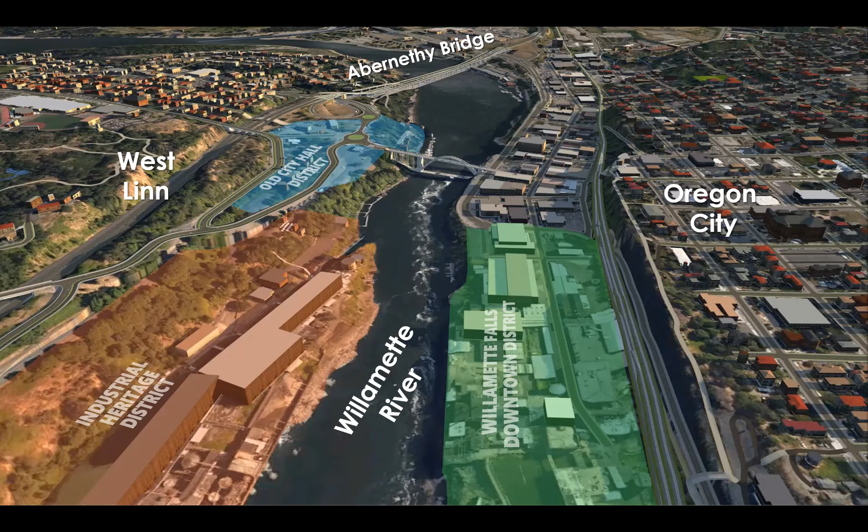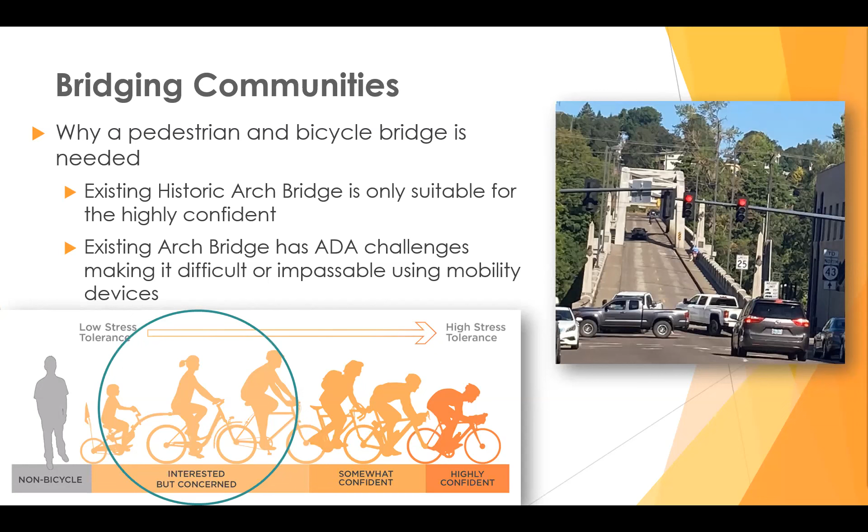We wanted to create this plan to create opportunities for the interested but concerned travelers and cyclists, which would accommodate 70% of the population if we were to identify a ped bike only bridge. As I mentioned, the Arch Bridge has ADA challenges, making it difficult or impassable for folks using mobility devices.

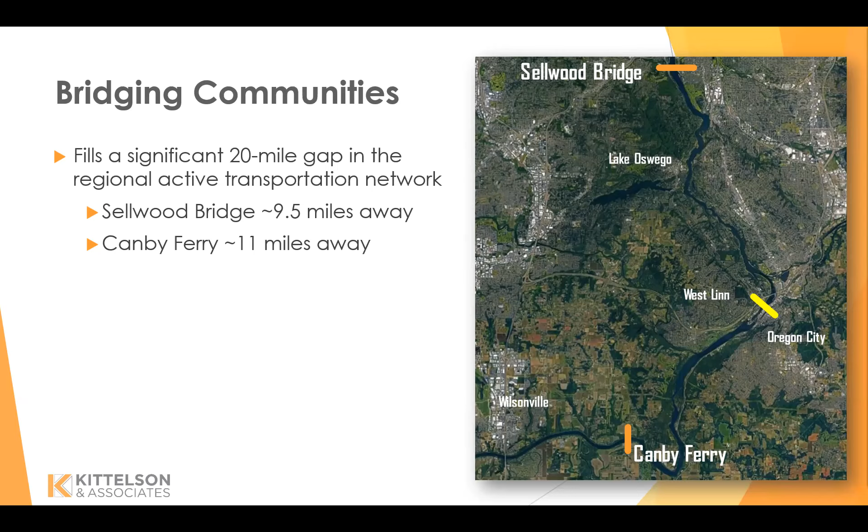This project encountered numerous challenges, ranging from the technical and physical challenges of designing a bridge that met the 5% grade, because there were steep differences in topography on either shoreline. We also had the challenge of incorporating diverse perspectives, and coordinating with various transportation and redevelopment projects in the area. So the challenges were numerous.

For the purpose of this presentation, we'll be focusing on the challenges with integrating diversity, equity, inclusion, and access around planning in a culturally and historically significant location, implementing an equitable engagement framework, as well as engaging with communities during a global pandemic.

Some of the challenges Nick will be addressing are understanding the key destinations and demand for the new bridge. What are the destinations and how do we locate the best connection? And then also assessing view sheds. Next slide.

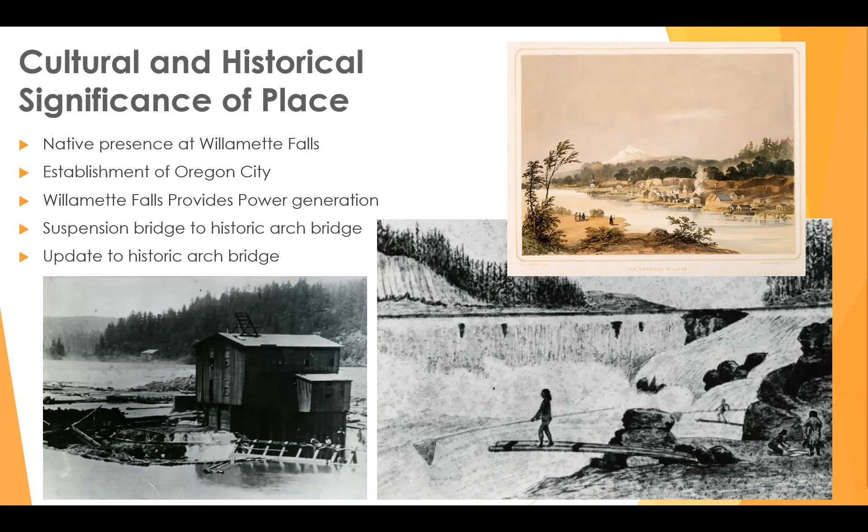We also learned through looking at historic photos and doing some research that there was a suspension bridge for pedestrians back in time before the historic arch bridge, which was used as the temporary access. Next slide.

And so with creating an inclusive engagement process, as I mentioned, we engaged with communities throughout the project with focus groups and was able to offer compensation through ODOT's equity engagement compensation policy. We initiated tribal consultation and also invited them to participate in our project advisory committee.

That engaging with them early and often was a key component of our decision-making process. We communicated to the advisory committee and the steering committee early on that we were elevating the voices of the historically marginalized communities and voices.

We heard some interesting perspectives through our conversations with the tribes, one of which is that, while we thought that creating a bridge connection closer to the Willamette Falls would be a benefit for all, we learned that many of the tribes did not prefer that alternative because they still engage in cultural activities and didn't want to be kind of a spectacle or looked upon. So that was actually a less preferred alternative for several tribes.

We again elevated the voices of historically marginalized communities. We engaged with focus groups, including youth, and heard about some of the benefits and burdens of the various alternatives.

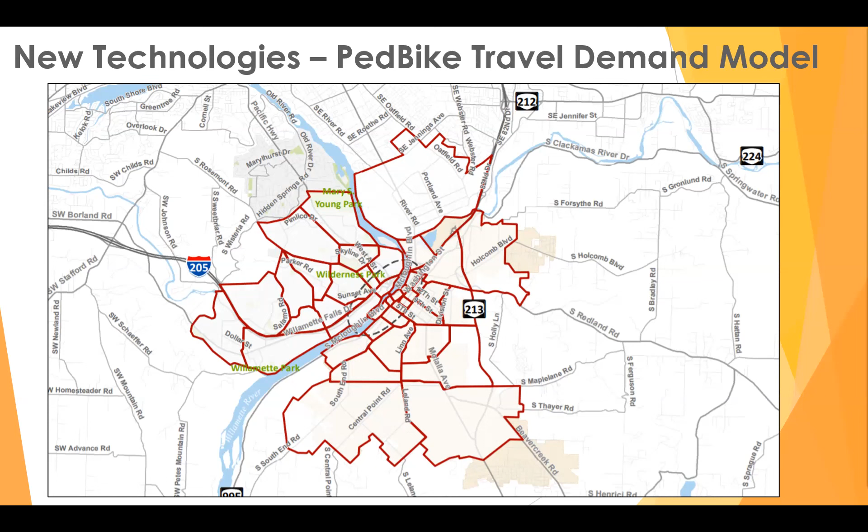So using this data as a platform, we created a ped bike travel demand model specific to our project area. The polygons or outlines you see here in red are our zones, our transportation analysis zones, or TAZs, as some people may have heard of before. These were uniquely identified by our project team, trying to understand the general breakpoints of land use and origin destination, essential destinations. So we ended up identifying 40 zones that we wanted specific StreetLight data pulled from to understand how people are traveling today.

We then created our own internal spreadsheet tool of a travel demand model based on the outputs of that StreetLight data. I want to specifically touch on some of the attributes we included in that model and some of the assumptions. The first was distance. This should all be thought about as accessing these future and potential bridge heads. So how far are people traveling to access a given bridge head on a given alignment? The further the distance, understanding that mode choice - if it's shorter, we're seeing higher use of people walking, if it's longer, a bit more people biking. But around the one mile mark is where we start to see those numbers taper off.

We also considered comfort, and we conducted what's called a level of traffic stress analysis to understand the comfort and experience of someone accessing a bridge head.

So how comforting or stressful is it to access that bridgehead based on the existing facilities that exist today, as well as the planned facilities already adopted into the city's transportation system plans. We also considered grade, thinking about elevation change to access a bridgehead. A steeper trip may mean less demand for that bridge alignment. And then finally, connectivity, thinking about barriers people might face accessing a given bridge alignment.

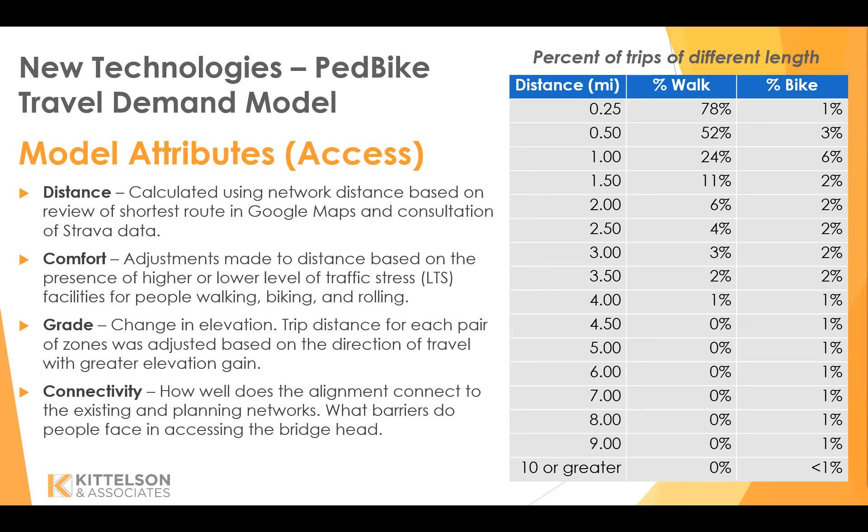A couple more softer assumptions went into this model. The historic arch bridge is not going anywhere. It's a great asset, very aesthetically pleasing, and it's going to remain. So while it's a barrier for some people using mobility devices, and challenging for people walking and rolling with the shared lane, it still functions as a connection. We assume that if it provides the shortest path for people walking, they would likely still use the historic arch bridge today.

For people biking, those who've biked across the historic arch bridge from West Linn to Oregon City have a fairly good downhill grade. We assume people biking would still go from West Linn to Oregon City, because you travel about 15 miles an hour, roughly the speed of vehicles, so it doesn't feel stressful or like you're holding up cars. Whereas biking from Oregon City to West Linn, you're going much slower.

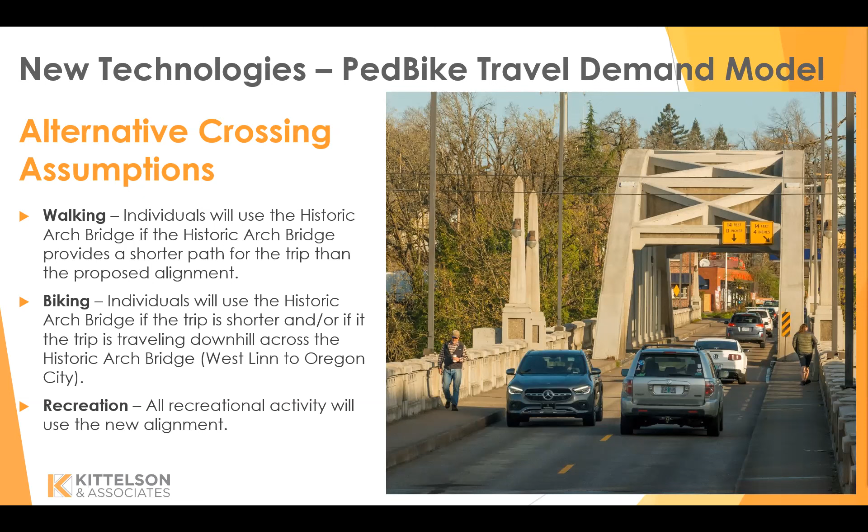And then recreational trips, we assume that all new recreational trips would use this new theoretical bridge alignment.

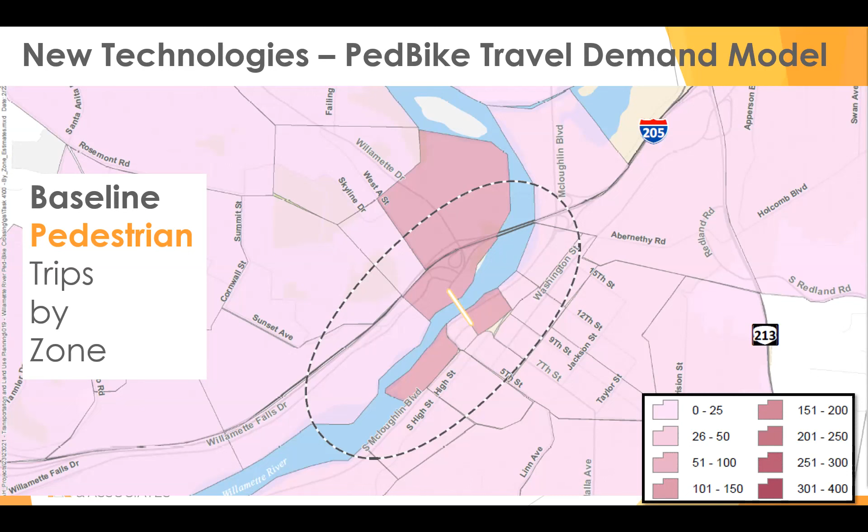These next couple slides are quick outputs of what the model looks like. This shows the baseline scenario of pedestrian trips, where darker colors represent higher levels of travel and lighter areas represent less. Here are two scenarios: the baseline on the left, the middle image is the upstream alignment closest to the falls, and on the right is the downstream alignment, where you can see darker colors popping up, representing more demand for a downstream alignment.

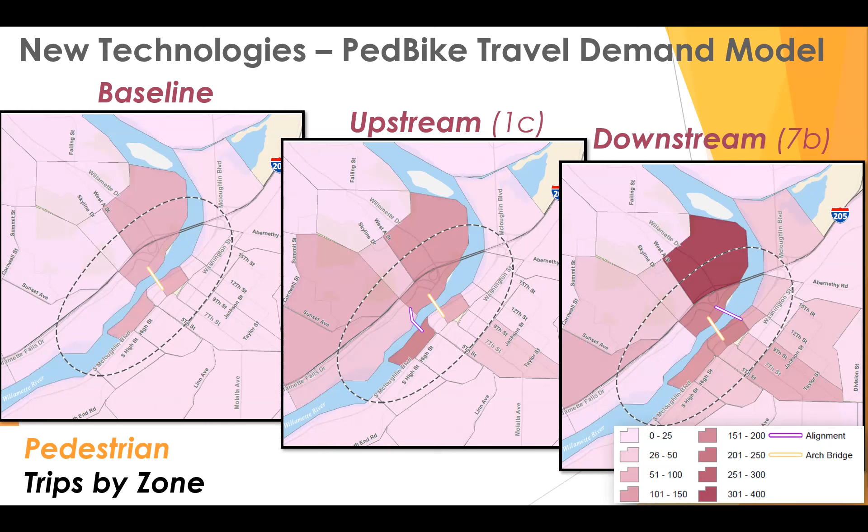We analyzed 5 priority alignments that rose to the top based on a preliminary screening. On the right side is a graph of future trips—new trips as well as potential mode shift. That trend going upward from left to right moves from upstream to downstream, so the downstream alignments show much higher demand for walking and biking trips.

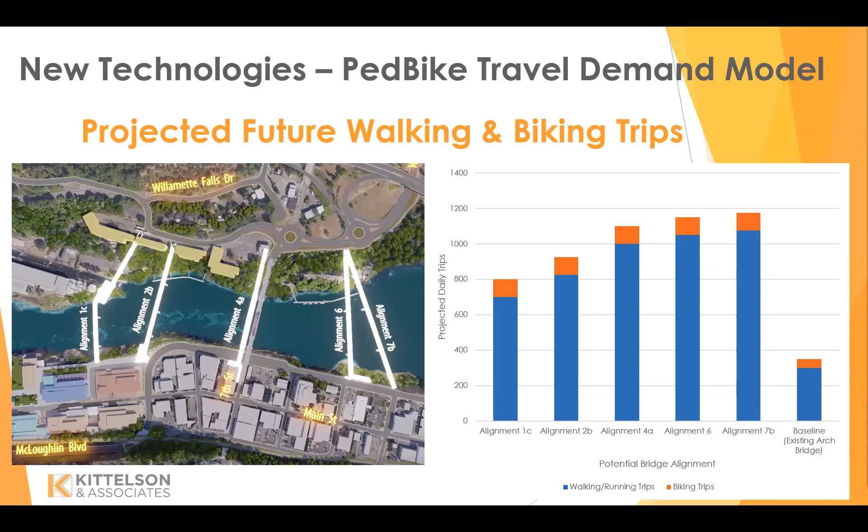We're pushing our time here, so I'm going to try to get through these ones relatively quickly.

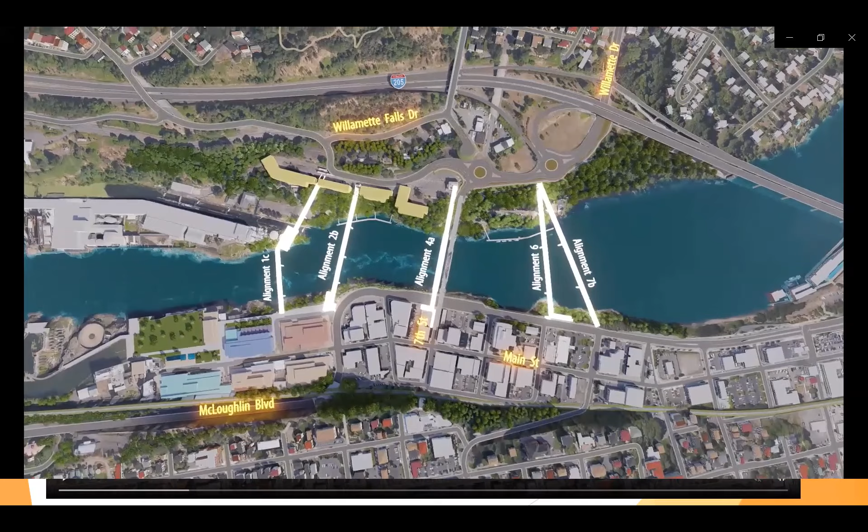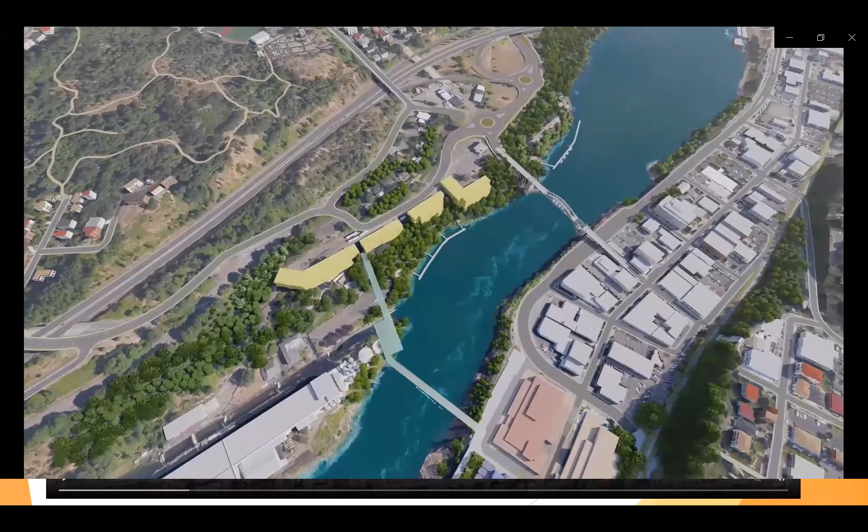One of the more exciting pieces I wanted to talk about is this innovative storytelling. We created a 3D model, and I'm going to show a very quick video of what that looked like. This was really aimed at addressing the concern of view sheds—thinking about whether a given alignment obstructs the view looking at the historic arch bridge, or the view looking to the Willamette Falls from the historic arch bridge.

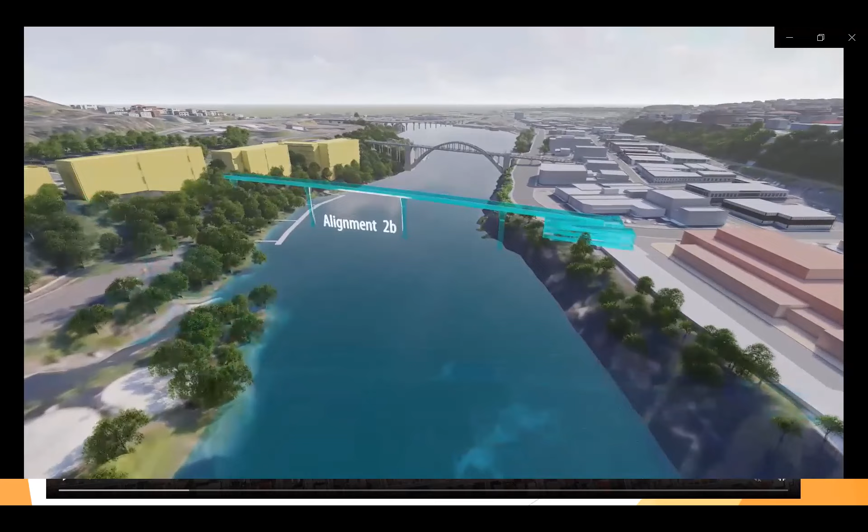So we created this model. It incorporates future planned development. I'm hoping everyone can see this—I can see Sandra and Zachary, thanks. This is flying through, illustrating the future potential alignments. You can see a lot of the ramping structure that's required.

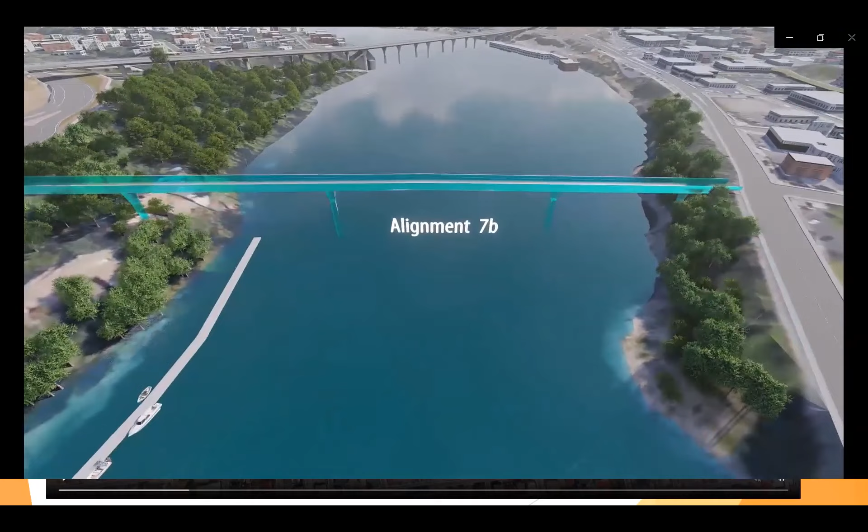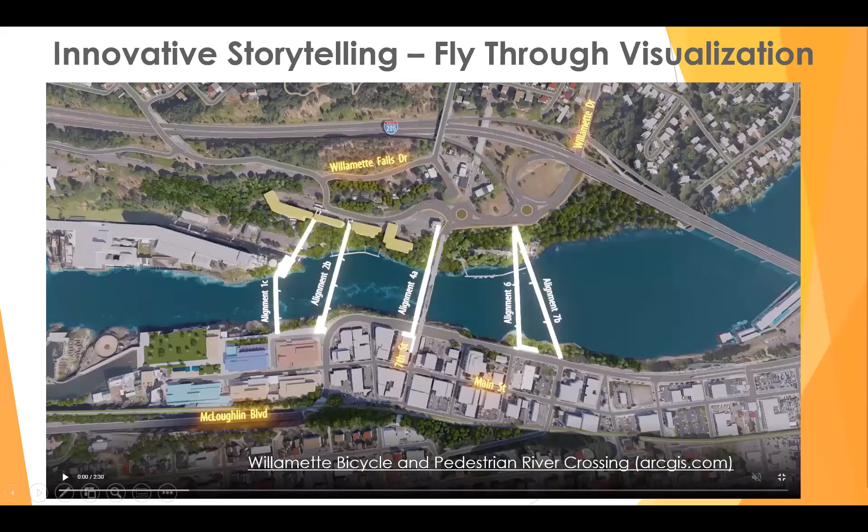A lot of our work was driven technically by grades, the navigable clearance required from ships and the Coast Guard, and the ramping structures needed to elevate the bridge high enough to meet that 5% maximum grade, as well as provide clearance for navigable ships. The fly-through going backwards is just down at water level. Given we're running a bit short on time, I'm going to exit out of this and wrap up shortly.

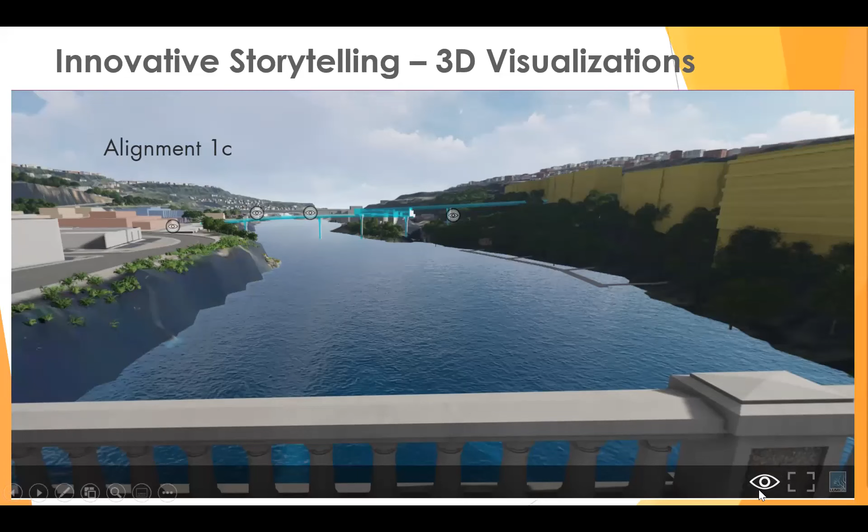One last bit on the model we created: we also had this user component to understand if you were to insert yourself within the model, somewhat of a virtual reality feature. These eyeballs let you click on them and pop around to certain perspectives in the model.

This is showing a perspective up on the Oregon City bluff. You can see the upstream alignment on the left side of your screen there, and then pivoting to the right, you can see the downstream alignment.

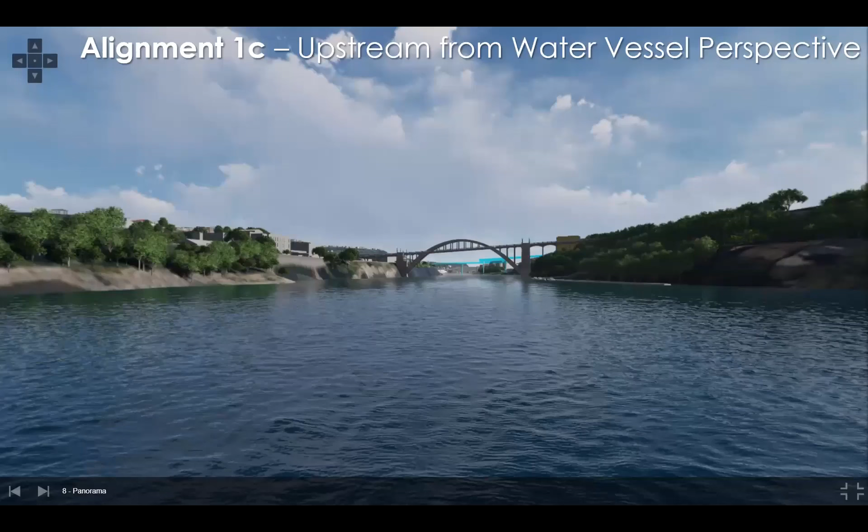Here's a perspective again that you could just zoom in and pop yourself in on the water. You can just make out the upstream alignment underneath the historic arch bridge there, and then the downstream alignment here, much more present and in the foreground.

So in conclusion, this planning process lasted about a year. We started with preliminary 7 options based on feedback from our project management team, our advisory committee, a leadership team, public comments, stakeholder interviews, and a lot of tribal consultation that Sandra had mentioned. We identified specific groups to focus on - the youth and the elderly were identified as groups we didn't engage very well in our initial outreach, so we went back and specifically targeted those groups.

And those 7 alignments morphed to 15. We then did an evaluation screen of the 15 to narrow down to the 5 most promising, which is what you saw in the model there.

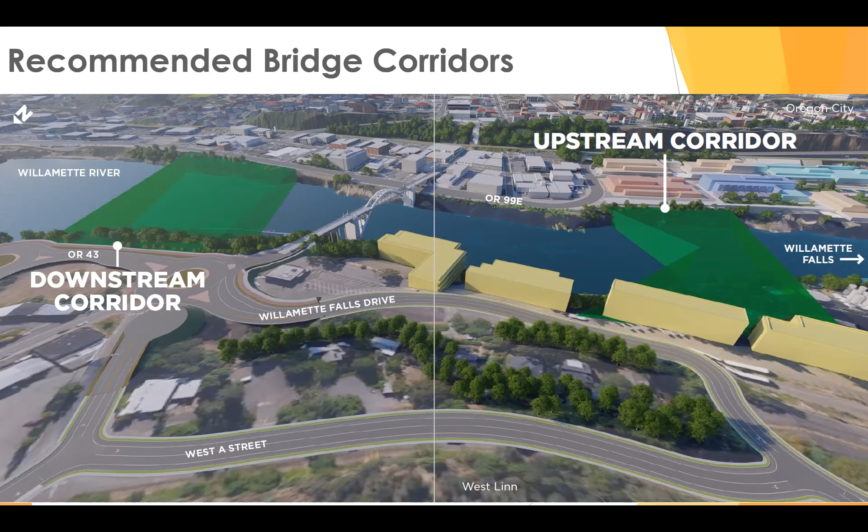And so there is a parallel project going on - it's actually further along. It's the Willamette Falls Drive realignment project, which incorporates these new roundabouts. It's been adopted into the West Linn TSP. It has separated, fully protected bike lanes on both sides of the Willamette Falls Drive corridor, as well as the realignment of West A Street. So there is a lot of future planned active transportation facilities and investment in this area. But today, the question - it doesn't connect to a whole lot if you were to think about a new bridge today, but it will, by the time hopefully this ever gets built, it should be connecting to a much more comprehensive network.

There's a question in the chat. At the beginning of your talk, you mentioned people with disabilities and later ADA considerations. Did you have any on your planning team who are in this category?

Yes, we had a call for advisory committee members, had folks apply. We had several interested, and they described their reasons, and we had one advisory committee member who spoke of their disabilities and participated in the decision-making process.

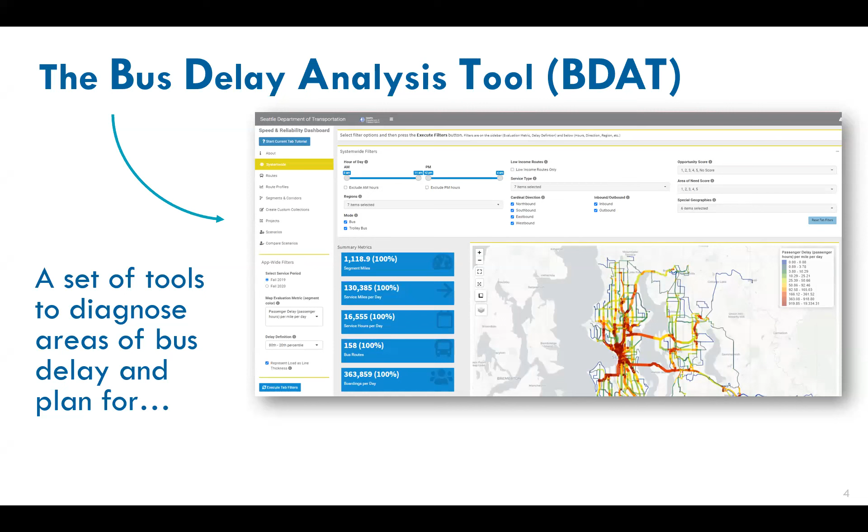So what is this bus delay analysis tool we mentioned, abbreviated BDAT? It's this interactive dashboard we're showing on the right, and we're going to pepper it in throughout the presentation. It's a set of tools to diagnose areas of bus delay and plan for speed and reliability improvements. The piece Esther is going to demo today is this project and treatment module shown on the right here.

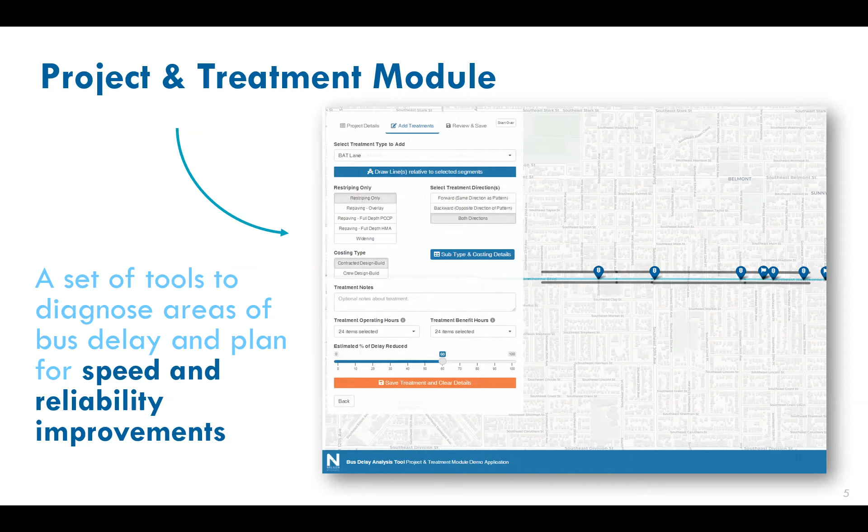And in Portland, buses carry about 60% of riders before and during the COVID-19 pandemic. The national average is about half of all riders in urban areas were on buses prior to the pandemic. This proportion actually went up, especially in the beginning of the pandemic, when more discretionary commuter travel decreased on rail systems.

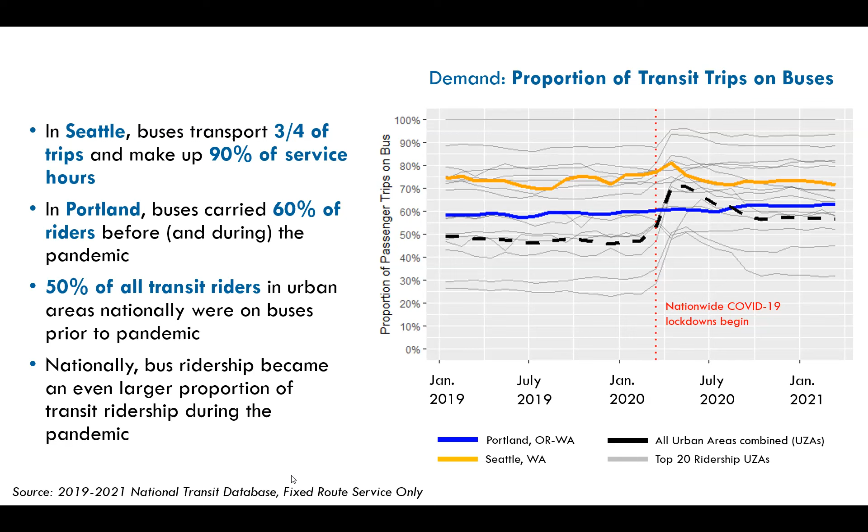But buses are slowing down. As anyone who's out there on the road can attest, they're caught in the same general traffic trends as everyone else. This is somewhat an old stat, but over about a decade, TriMet bus speeds declined by 9%.

Sorry, there's a bit of a lag. The thing I was going to mention was that TriMet spends about $1 to $2 million a year adding service just to keep up with congestion, not actually adding new frequency. Can we figure out how to make the slide advance? Oh, okay, great.

And obviously this isn't actually making service more attractive for new riders, which is one of our main goals when we're planning transit. So obviously it's an issue we want to solve for. All that's kind of motivation for what we're going to talk about now, which is the bus delay analysis tool.

So we developed this in response to problems we were seeing across a lot of our transit agency clients. These are some of the top ones: where is transit delay happening? We'll talk about what we define as transit delay, how many passengers are affected, what time of day it's happening, what direction, and a variety of other questions we strive to answer.

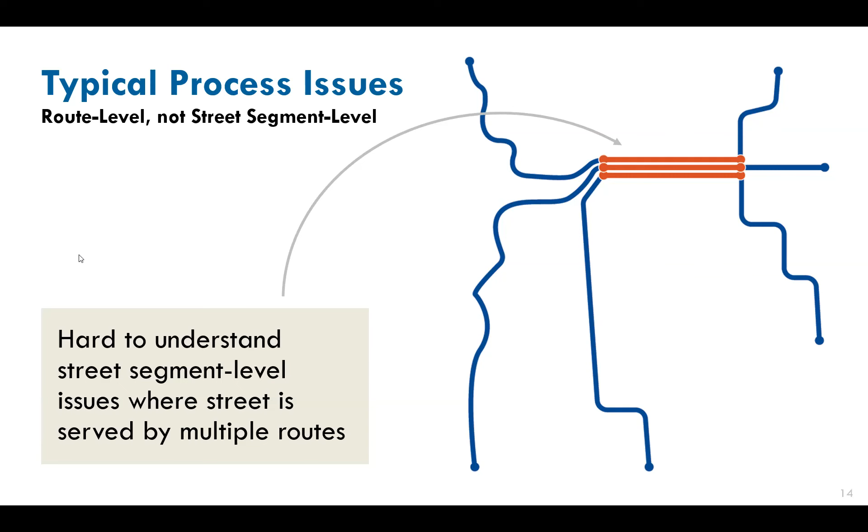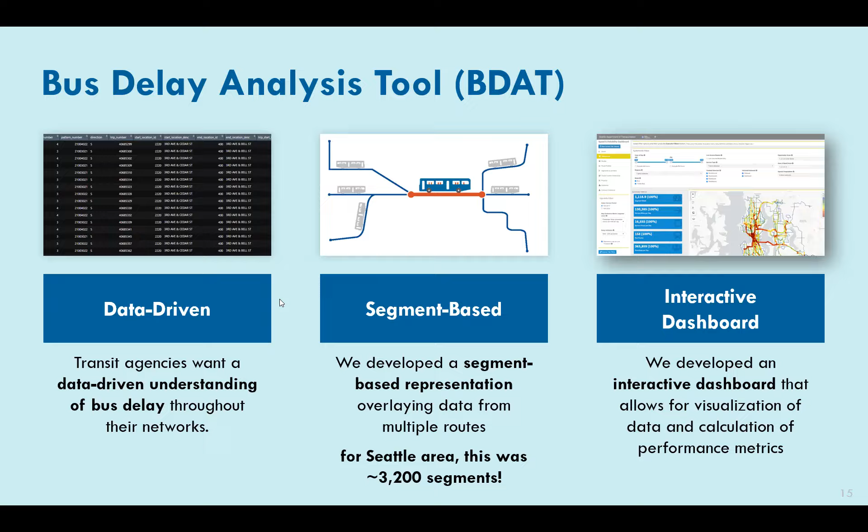So all these motivations resulted in this tool, which allows transit agencies to understand bus delay throughout their networks in a data-driven way. It relies on a segment-based representation. For an idea of scale, the Seattle area had 3,200 different segments, and it relies on an interactive dashboard to make all of the data we're analyzing more accessible to the client.

So, transit delay. There's no textbook definition to refer to for this. We developed this definition to get at the problems that a lot of different agencies were seeing. Basically, we define delay as the difference between a relatively good travel time on a given segment of roadway for a given trip, and a relatively bad travel time for that same trip and same segment of roadway. We typically use the 80th and 20th percentile to represent those good and bad travel times, with the difference between them being segment delay.

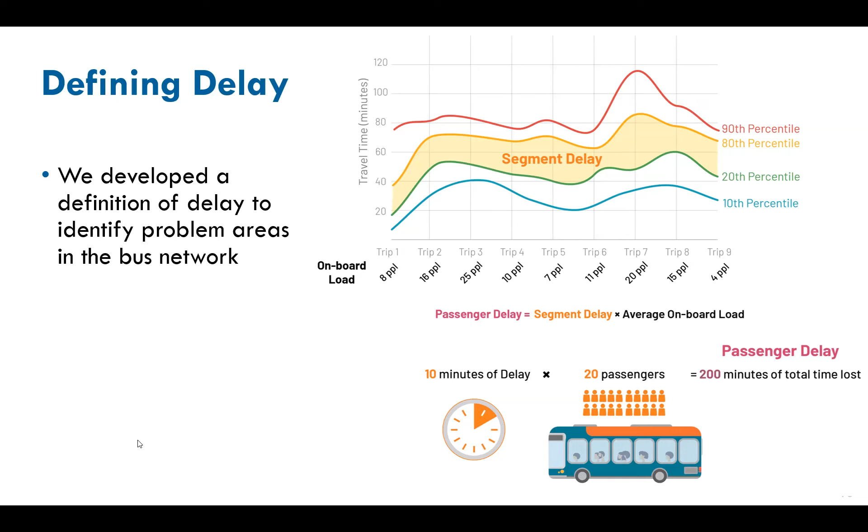We then summed that up over the course of a day, for every segment and route. We also weighted that by average onboard load to understand how many passengers it was affecting, and also tried to normalize that in various ways, for example to represent how much service was being provided on a given segment.

Another key definition is what we're talking about when we talk about segments. The starting place for segmenting a network was to divide it wherever routes converged or diverged, so you could describe every single bus route in terms of a series of roadway segments. But we also created new segment splits wherever there was a key intersection we knew was causing congestion issues, or another kind of major modal intersection, like with a rail system.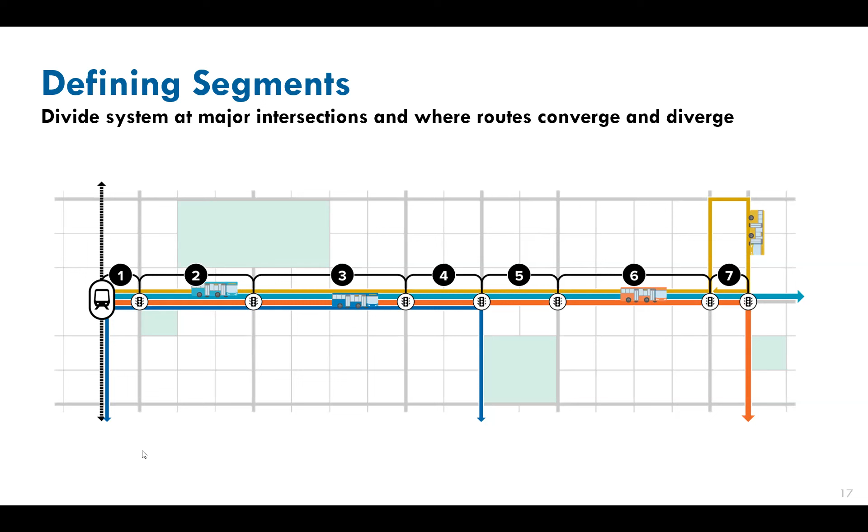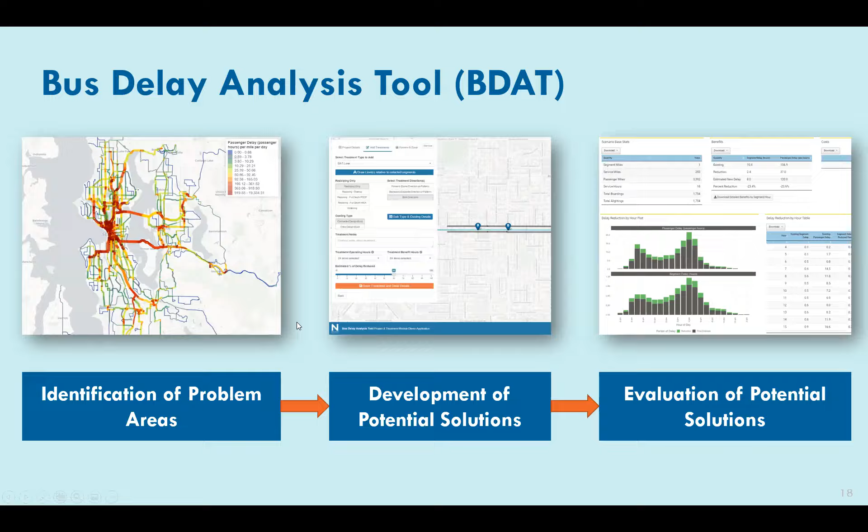And just taking one more step back, where does all this fit into a typical transit analysis project lifecycle? As transit planners, we're always responding to real world conditions and using our various measuring tools, like the AVL and APC readers, to abstract those real world conditions into performance metrics. We then take all those measurements and use them to identify problem areas, which is what we did initially with the BDAT tool. Next, we're developing and evaluating potential solutions to those issues. Then, hopefully if we've done our jobs well, those solutions get designed and then implemented. And then we see new real world conditions that we can analyze again and keep iteratively improving.

Okay, so with that, I'm going to hand it off to Esther to talk through the case study. Thanks, Brian. Hopefully these slides are not getting too laggy. So I'm going to talk a little bit about the work that we did with Seattle.

We were working recently with the Seattle Department of Transportation on a project focused on speed and reliability improvements for the bus network. We had a number of different questions we were trying to answer, as well as developing some conceptual treatments. One question was, where should we prioritize speed and reliability improvement? So where are the areas of highest need? And what would be the treatments or improvements that would have the biggest impact? So what should we implement? And how much are they going to cost? And how can we prioritize amongst those?

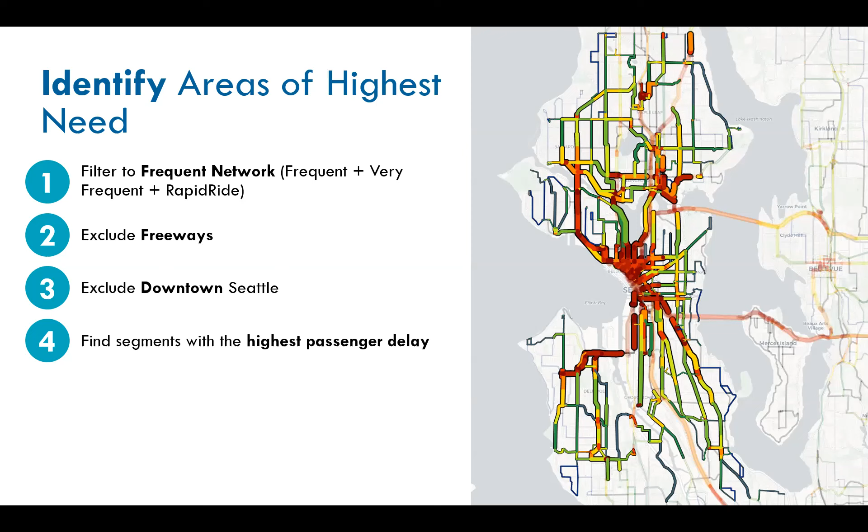So we used the tool that Brian's been talking about to try to help us answer some of these questions. The first step was to identify those areas of highest need. To do that, we had a couple of different criteria that we used to filter down the overall segment network. We have the entire King County Metro network segmented, but we filtered it down to Seattle. Then we looked at just the frequent network, excluding freeways and excluding downtown Seattle, because that had some of its own planning processes going on. We wanted to find the segments with the highest passenger delay, looking at passenger delay rather than segment delay on its own, because, as Brian mentioned, passenger delay is weighted by load. So it's looking at where the areas with a lot of delay are affecting the most people.

And then once we had those sets of segments narrowed down, we wanted to group them together into logical corridors or spots. So segments can be rather short, depending on how much service there is in an area and how many intersections or arterials are crossing. There might be a situation where we have several contiguous segments, or several segments near each other, that we could group together to make something like a more logical geography.

So once we did that, we wanted to say, okay, amongst all these areas that we've identified, how can we prioritize the ones we actually want to provide conceptual treatments for? To do that, we produced a transit score and an equity score, which I'll talk more about. Then we prioritized among those areas of highest need, looking at those pieces of data.

As we were doing this, we realized we were finding a lot of areas that had also been identified previously. So we're using this very quantitative process, and it's showing us areas that the city already knows are issues. Some of them had already been identified, and some already had planned and funded projects, and some had projects already completed, because we were doing this work in 2020 and 2021, but using fall 2019 data. So if a project had been completed after fall 2019, we would be seeing the delay from before that time. We used fall 2019 because 2020 data is obviously a little unreliable. So it was good news to us that we were finding areas that had also been found by other people.

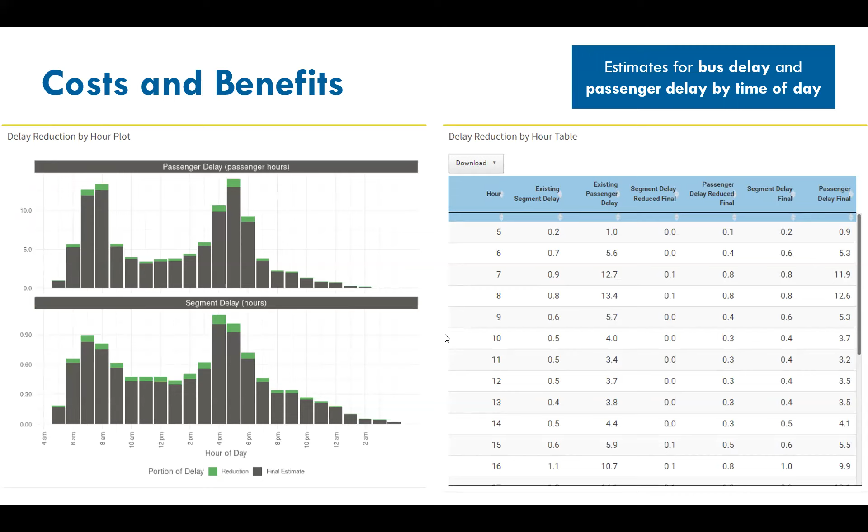And then we also have the delay benefit broken out by hour of the day, so you can estimate like peak delay benefit, for example.

So finally, once we did this for many different locations, we were able to produce those estimated costs and benefits for each one, and we wanted to be able to prioritize amongst those. We also created a lot of different cut sheets and statistics. It's all kind of internal right now, so I'm just showing you examples, but this is some of the statistics we were able to create, along with visuals and a lot of different maps.

But for the prioritization, we used the equity score and transit score that I talked about before to create a need score. And then we looked at the costs and benefits. So what were the costs? What's the estimated delay reduction? What is the delay reduction per dollar of project cost essentially?

And then based on the prioritization and the cost and the need, you can group them together into different funding scenarios. So if you know you want to spend X amount of dollars in 1 to 2 years and you want to get this amount of benefit, you could section out the different things, and maybe in 10 years you have this much money, and we can plan for it that way so that they can start applying for funding.

Okay, so that's all we have for you today. I know there's a lot of different information.